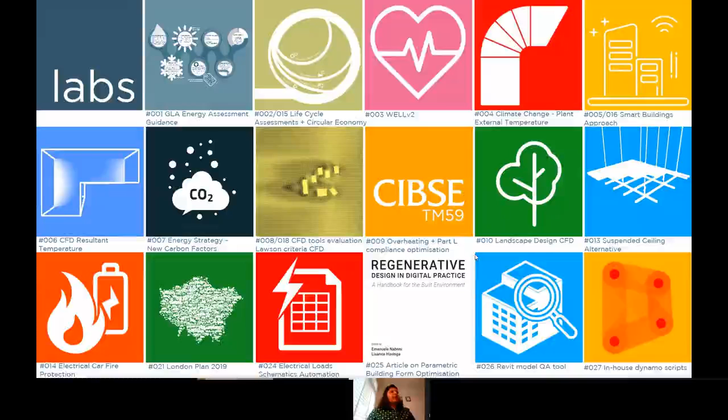That's a great initiative by Chapman's for keeping some resources and time aside for these things. The ethos of all our projects is this relationship that we call a planet to person to planet relationship. So starting from looking at the site climate, then master planning stage, looking at how the buildings should be designed in a particular microclimate or climate, then looking at buildings design, occupant behavior and how they perceive the building, and then giving back to the planet in terms of reducing embodied carbon and going for the certification scheme. So it's a relationship that we follow in all our projects.

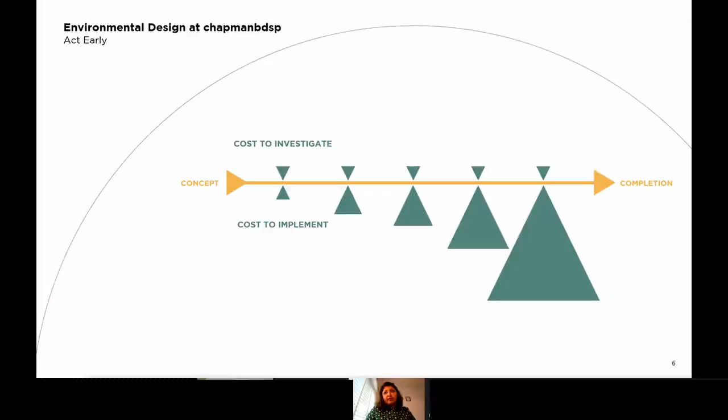We always suggest our clients to act early in the project because these passive design measures are easier to investigate and implement at early stages of the project rather than leaving it till later. Also, we all know we are in this climate emergency, so it's really important to act early in the project.

Like our peers, we have signed the construction declaration. That doesn't mean our job is done. We are striving to reduce carbon in all our projects, and also in how we operate our business. Obviously, we have this big target of having all new buildings zero carbon by 2030, and all the existing and new buildings zero carbon by 2050.

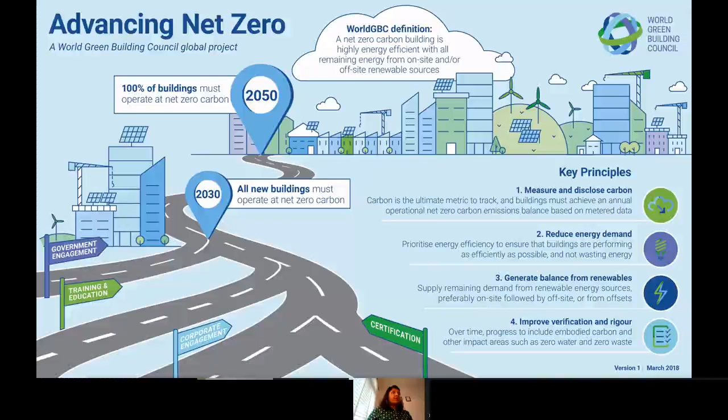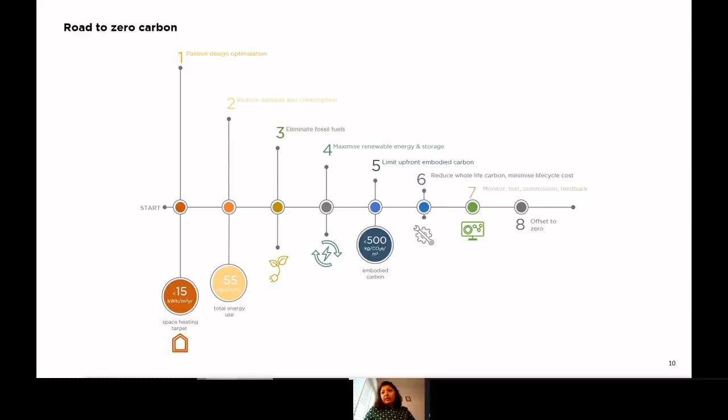So that's a massive challenge ahead of us. In terms of talking about the road to zero carbon, I would like to say it's an 8-step approach. The first two things that we are going to talk about: the first one is obviously passive design optimization, and the second is reducing demand and consumption of the buildings. These are the two topics that we'll be covering today. All of them are so involved that there could be a CPD on each of those steps, but the first two steps are the ones we are going to cover today. So now I'm going to hand over to Herman, who's going to talk about this project in Nairobi.

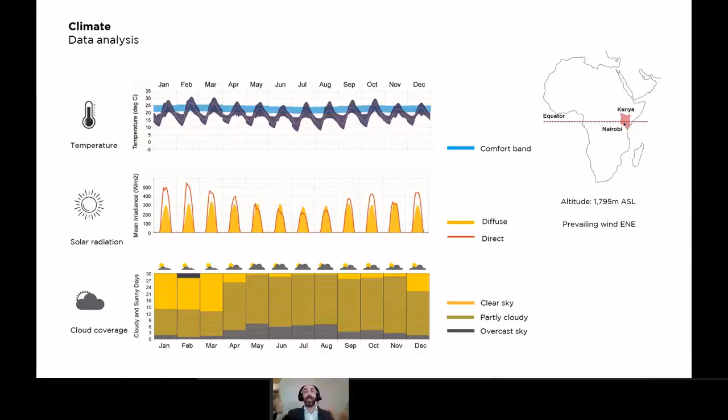That was a very good insight that we got, shown in the second graph, which is also related to the third graph showing cloud coverage. Typically, when you have a large amount of cloud coverage, you have a higher amount of diffuse solar radiation. So that was a very good initial insight on the site, on the location.

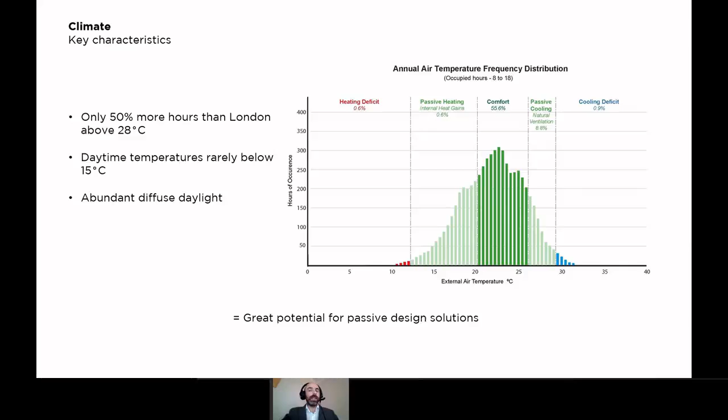Then looking further into how we can achieve comfort for this office, we looked at the period which falls within the comfort band, and the amount of time below the comfort band which we can still retain in comfort using the internal heat gains produced in the space through occupants, equipment, lighting, and most significantly, solar radiation. On the other side of the comfort band, we have the percentage of time for which we can still retain the space within comfort through natural ventilation as a passive cooling solution. That showed us that using passive design, we can pretty much have the building operating within comfort purely by using internal heat gains during winter and ventilating further during the summer period.

When we looked at other case studies or examples of what's happening around the site, most of the other towers were in a way climate rejecting - they try to produce a building envelope which segregates the outdoors from the indoors, with the indoors conditioned through air conditioning. We didn't want to go with that option; we saw strong potential for a passive design solution. We saw they had very few openable windows, cores sometimes located on the facades irrespective of what's happening to the daylighting, etc. Most of these spaces were rather gloomy, both because they were using tinted glass and because of the location of the cores. So we learned from these examples what we should avoid.

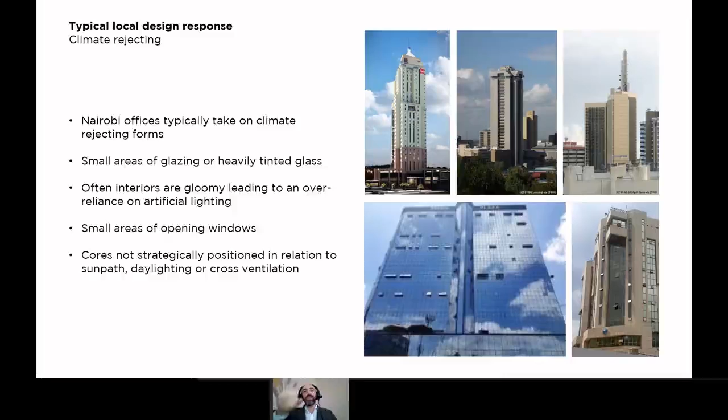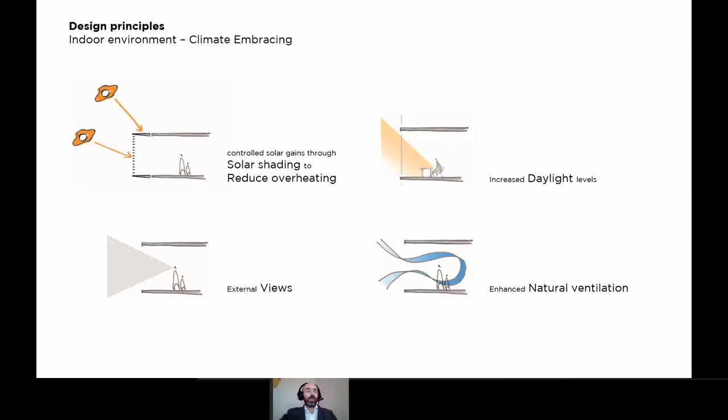Summarizing the lessons learned, we wanted to use solar shading to reduce internal heat gains during the summer period. We wanted good daylighting rather than relying on artificial lighting, and we still wanted to retain good external views for the place to be pleasant. We wanted to use natural ventilation as a means to retain the space within comfort during the summer period, or the warmer period.

So when we're looking at the different orientations, we saw that east and west were the orientations which received the highest amount of solar radiation, mainly because of the altitude of the sun when it passes across the east and west facades.

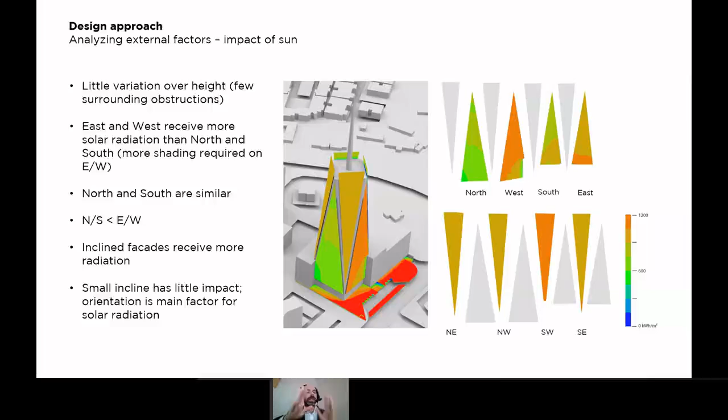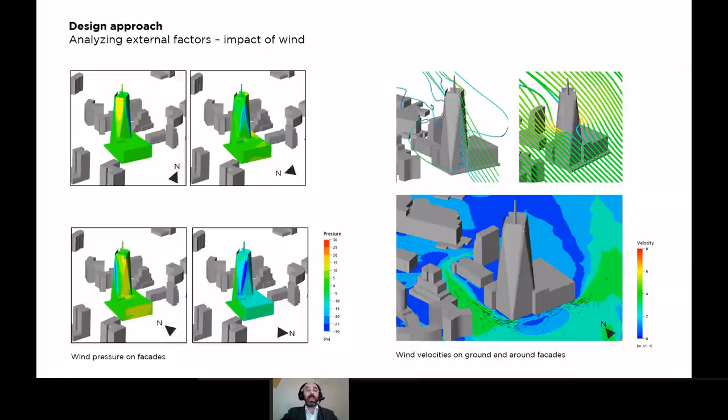So it gave us some initial indications, and then the inclination of the tower made a small difference, but not as significant as the orientation. We also did CFD to show what the wind pressure is, which can give us an indication of what wind speed we're getting for our natural ventilation.

And then we were setting thresholds or design targets with regards to daylighting. We were targeting a 2% daylight factor, which would translate in this climate to 200 lux on an overcast sky condition - that is when it's so cloudy you cannot spot where the sun is, which is not as common in this location. So we know this is a worst case scenario, while typically one would easily be over 250 lux, over 200 lux.

And we also had a similar threshold for the number of hours we would allow exceedance beyond the comfort band. Rather than having a fixed comfort band, we were using the EN 15251 comfort band, which takes into account that people's expectation of indoor temperatures relates to their previous experience over the previous 7 days.

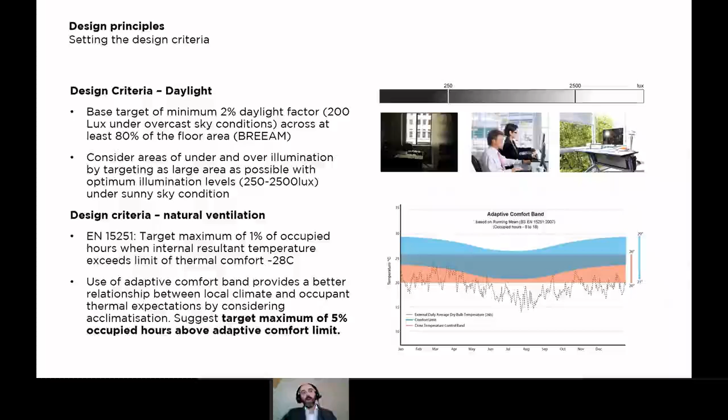And so then we're looking at, let's say, different palettes or different tools to try to get this cohesive passive design strategy. One aspect we definitely look at is the glazing ratio, then what percentage of the window will be openable or not, and then the type of shading and type of glass that we would use.

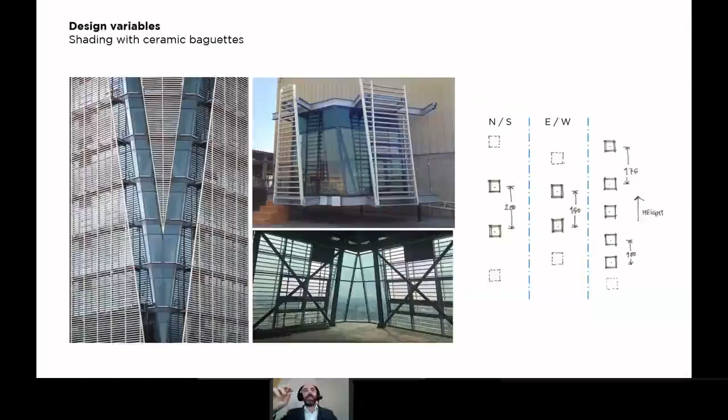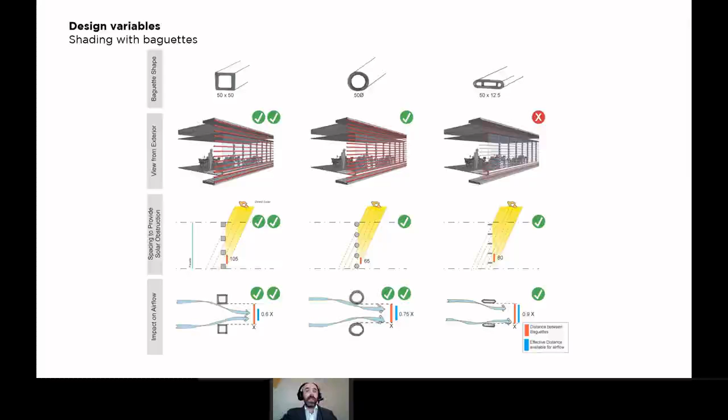Starting initially with the shading devices, we're testing different ceramic baguettes of different spacing and forms, trying to identify the benefits of each. One was definitely the view, especially looking downwards towards street level, and then we looked at how effective the ceramic baguette is at generating shading, and also its impact in terms of obstruction to the airflow.

While in a latitude like London, the third baguette might work rather well, especially for a south facade, in this location, due to the large amount of diffuse solar radiation, the first two baguettes were performing better because they were helping to protect a larger part of the sky dome.

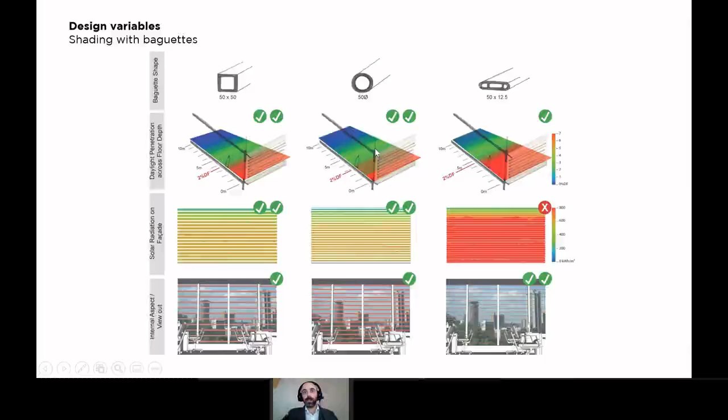Then we looked also at daylighting. Nowadays we look more to what we call climate-based daylight simulation rather than daylight factor. The daylight factor will show a performance irrespective of orientation, while when you look at the actual amount of lux falling on the grid, we can see the impact between what happens at 9 o'clock, at noon, and in the afternoon. So we looked also at that.

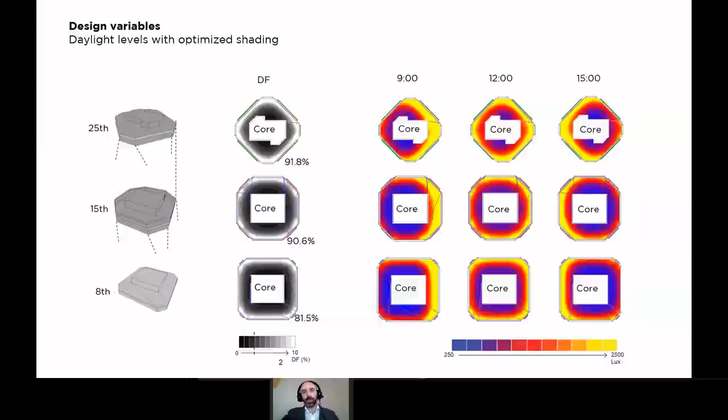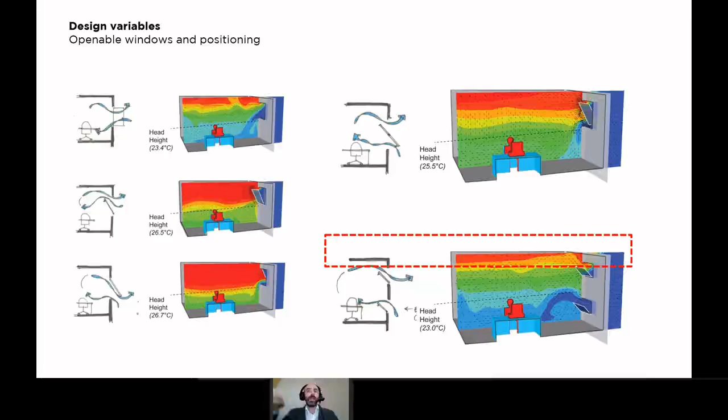And then trying to decide on the openable percentage of the windows, but not purely on opening the window, but also the location of the openable window. The most effective solution was to have two openings - one would have a less turbulent flow through the space, because generally the lower opening would bring in cooler air from outdoors, and then warmer air would seep out through buoyancy to the high level window.

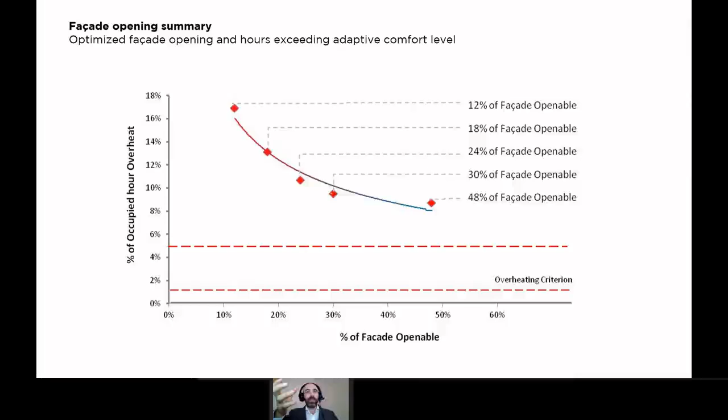Then once again, we're looking at the impact of changing the percentage of facade openable area with regards to the overheating criteria, and then adding the different passive design strategies. So first we started with rules of thumb for the percentage of openable area for the window, then we enhanced the selected glass.

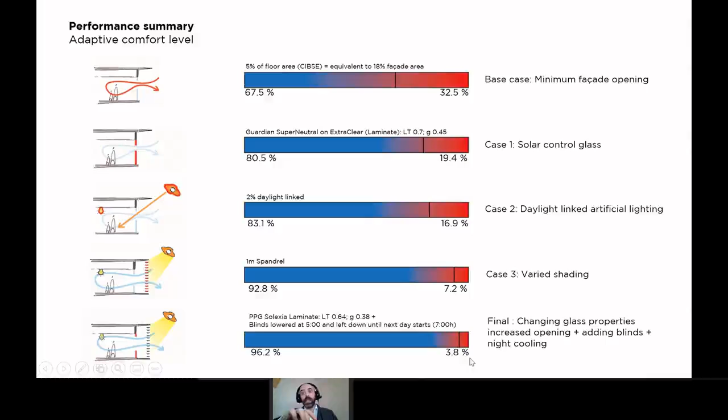Then we're doing daylight linking, that is, the artificial lighting would switch off when there's enough daylighting in the perimeter zone. Then we used the ceramic baguettes and saw the impacts of those, and finally we did some combined optimization, fine tuning the selection of glazing, baguettes, and openable area. It got us to a point where we'd be beyond the comfort band only 3.8% of the time, a very successful percentage considering the location.

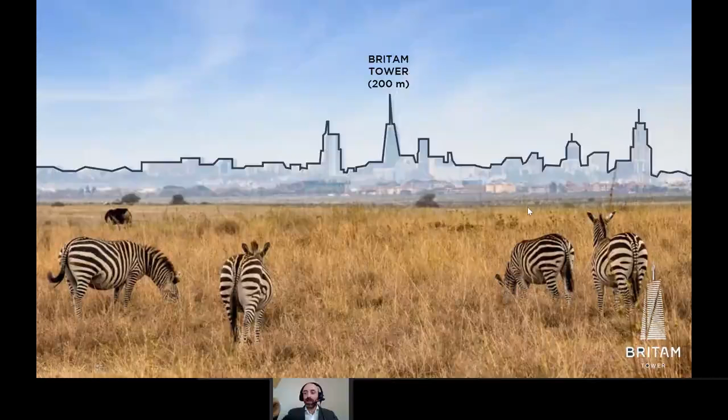This is the project, and yeah, we actually won an award very recently for the MEP of the tower.

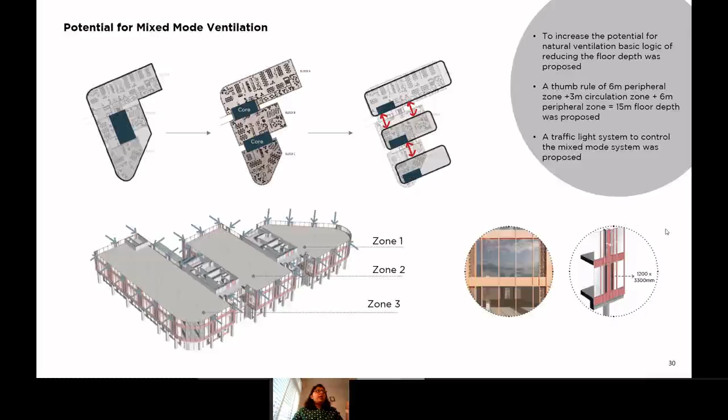Looking at different scenarios—one with only natural ventilation, a combination of natural and mechanical ventilation, and only cooling—we tested the cooling demand and what impact this would have.

To explain the graphs on the right-hand side: yellow is the case with cooling only, so that's our base case. Green is the case with mixed mode ventilation, assuming windows will open at 21 degrees and close at 23 degrees, as the cooling thermostat is set to 24 degrees, and then there's an intermediate case.

The reason for testing the intermediate case is because we are relying on occupants to open those windows. Some might decide to ignore the traffic light, or they might be busy. You might have 50% occupancy in the offices, so there could be different scenarios. So we decided to test an intermediate case where only 50% of the windows will be opened.

Looking at the results, just with mixed mode ventilation, we found that during the peak summer months—between May and September—the cooling operating hours can be reduced by 72%. That's a significant number. Even if only 50% of the windows are open, that could still reduce it by 48% of the time—again, a significant number.

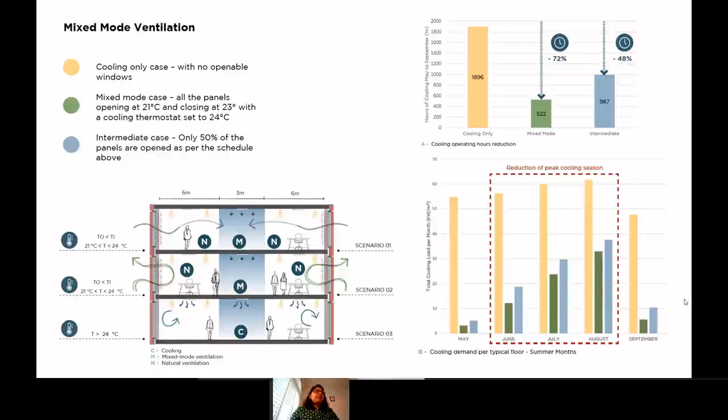Also, if we look at the monthly cooling demand during the peak hours within this red dotted line, you'll see the cooling demand is reduced significantly, and anything outside those peak months would depend mostly on natural ventilation, as the cooling demand wouldn't be as high. So that's a big green flag for incorporating mixed mode—obviously challenging, but still really useful.

Now I'm going to show a project example where all these principles were applied—that's the LSE CBR building. The environmental concepts applied to this project included outdoor comfort, flexibility and adaptability, natural ventilation, daylight, solar control, and all the rest.

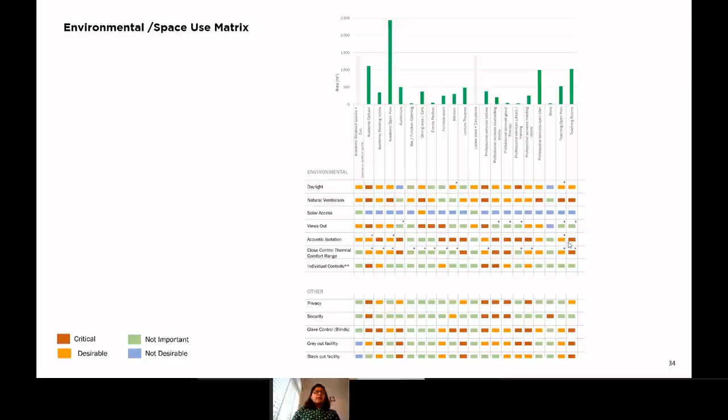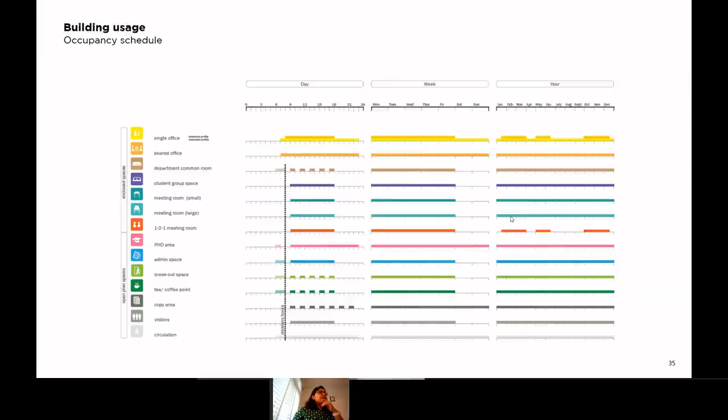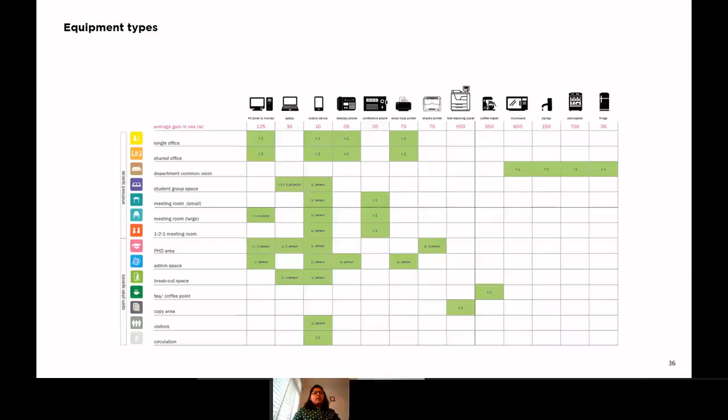Because the idea was to do a detailed energy analysis, we looked at what small equipment these spaces will have and how many of those equipments these spaces will have. All this helped into a zoning strategy.

Looking at the public and private zoning, we decided with the architects that the ground and basement floors will be more for public areas. The floors above, say first and second, would be more semi-public, so collaborative spaces, and the floors above that would be semi-private or private, with cellular offices, for example.

Going by the same logic, the lower floors in terms of occupancy will be high occupancy, so the auditoriums and big lecture theaters will be in the basement and ground floor. Then the medium to high occupancy spaces on the floors above, so that's your collaborative spaces again, and then the floors above that would be low and medium occupancy.

What this finally led to was a mechanical strategy where the lower floors with high occupancy and public areas were decided to have active cooling, so these are spaces like auditoriums and lecture halls. The spaces above would have mixed mode because these are bigger, more collaborative spaces, and the upper floors, which are smaller cellular offices, would be all naturally ventilated.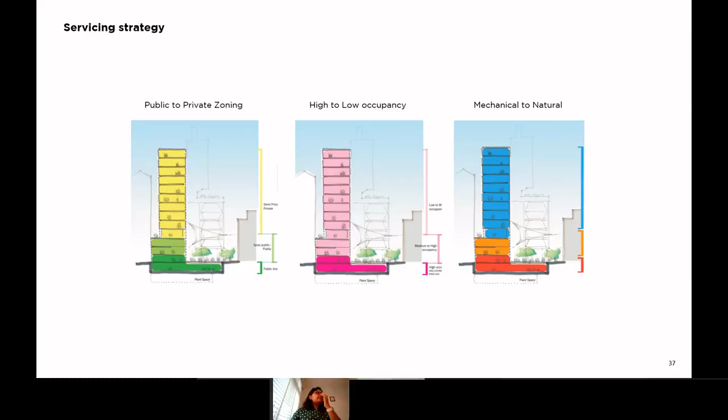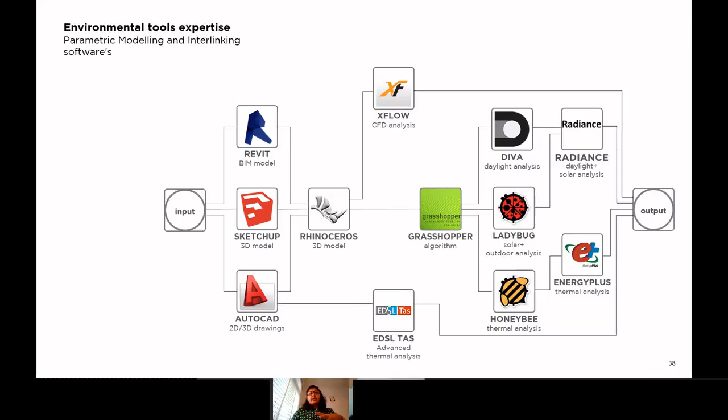The project was quite challenging, and trying to balance all those factors meant output from one software would be input into another to finally get to a result. It obviously involves some really clever algorithms and complex modeling.

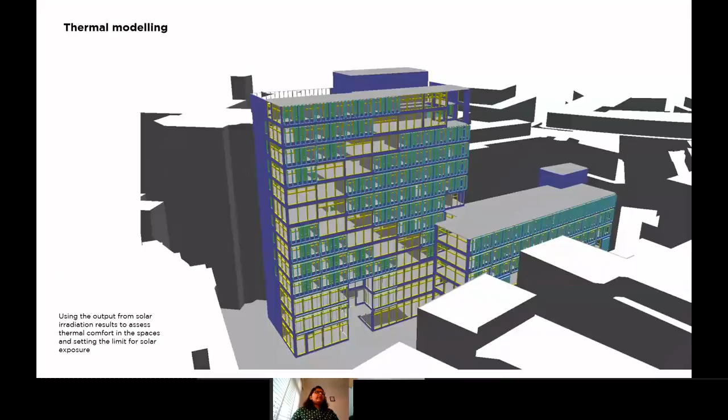I started looking at the irradiation mapping and what the solar exposure would be on the facade, then undertook a thermal modeling to see what the maximum fin depth should be to avoid excessive solar gains on the floors and avoid overheating. Applying that logic, we came up with a facade optimized design.

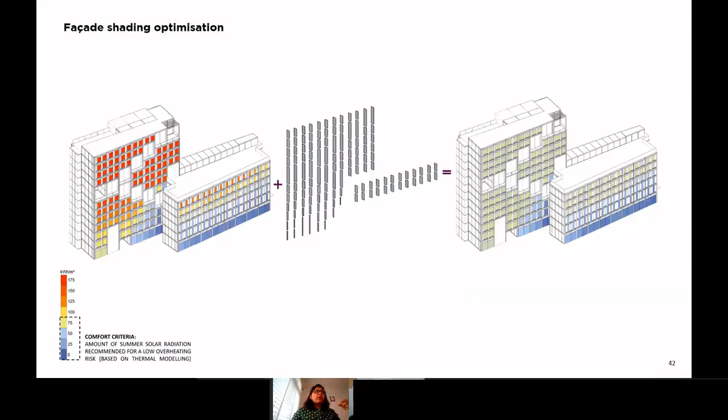I'll show you something after this slide, but this facade optimization made sure that the floors do not get excessive solar gains and they stay within the comfort range required to avoid overheating.

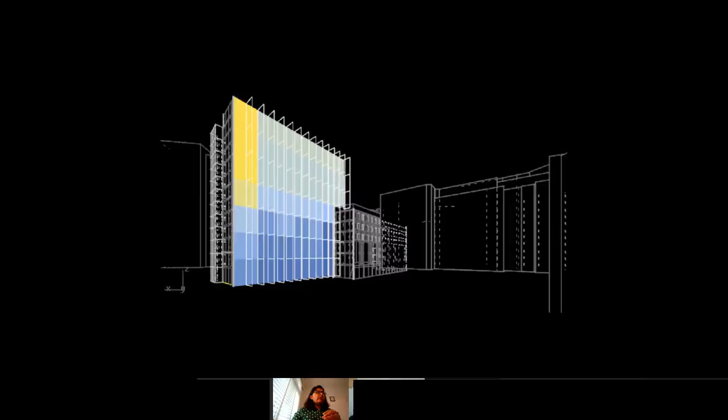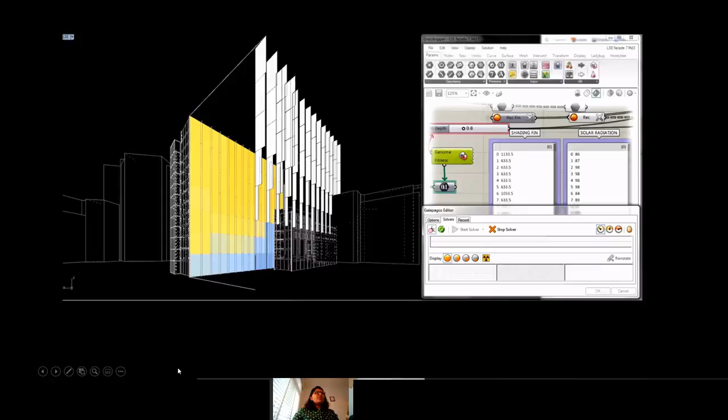Hopefully this video will work. It is a bit slow, I'm not sure if you guys can see it, but basically it tests the fin depth at each bay to figure out the optimized depth required to get the solar access levels desirable to avoid overheating. The video is really slow. Let's try if this works. Not really. Harman, can you see it working? Okay, no, this is not great, it's just extremely slow.

Okay, this is working now. So it's showing all the parametric modeling and how those two factors, solar access and overheating, were controlled through this design of solar fins.

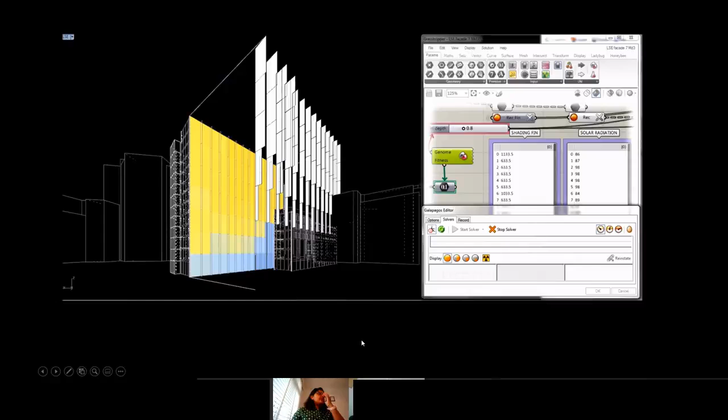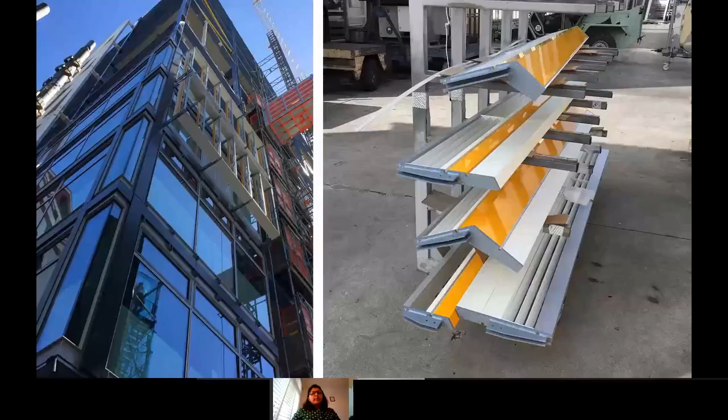To decide the spacing between those fins, a daylight study was done to balance daylight factors achieved on the floor plate against the overheating ratio. This is the final sketch of what the facade looked like, and a mock-up. The building is now complete and open for visitors to go and have a look around.

Also something about flexibility, which was really interesting because there are so many different types of spaces in this building. We looked at different flexibility and different modules, and what fenestrations we have for facilitating natural ventilation, for example a combination of high-level automated windows, manual windows, fixed windows, internal doors, glazed partitions, and others.

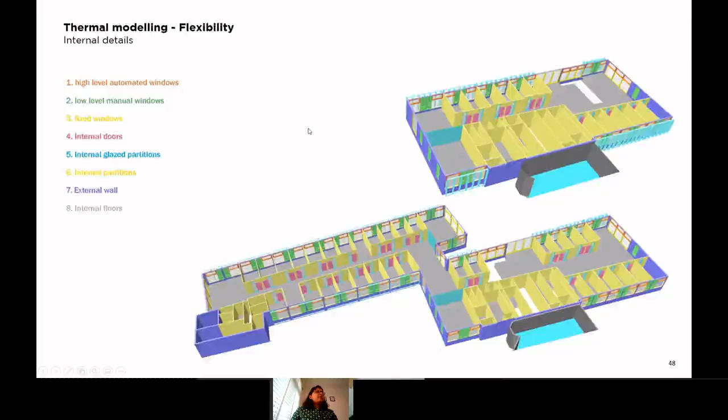We looked at what typologies we can have on each floor. So there are some floors with cellular offices on each side and circulation space in between. Some floors have cellular offices on one side and open plan collaborative spaces on the other side. Some will have cellular offices and double height spaces on the other side.

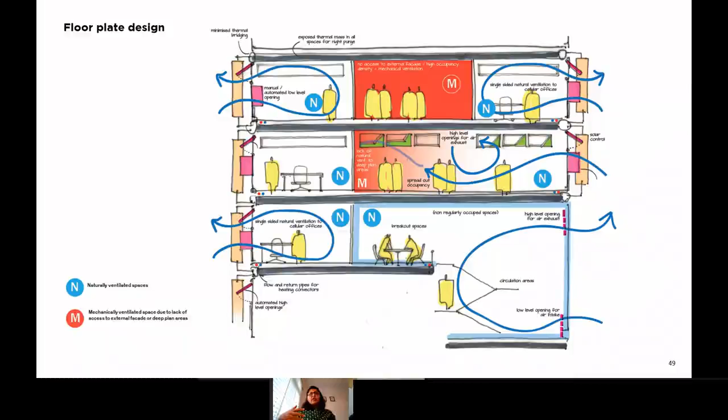It was a combination of natural and mechanical ventilation, especially on lower floors where we were going with a mixed mode ventilation option. On the floors above, where we have completely naturally ventilated floors, we did a detailed overheating study to look at if we meet the TM52 criteria.

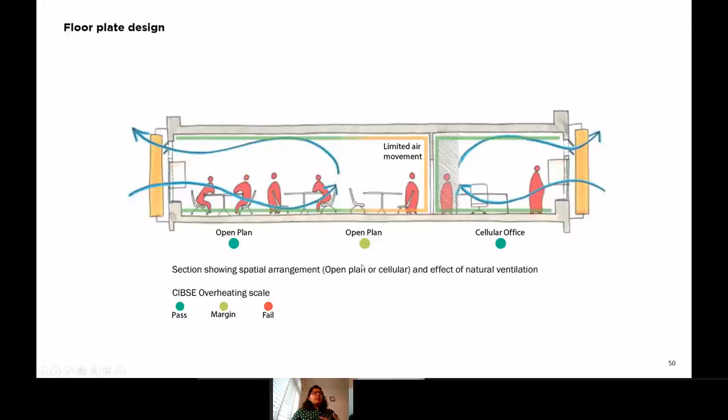The greens, as expected, show the spaces next to the windows, the peripheral spaces, met the overheating criteria. The spaces which were more internal marginally met the requirements, but none of them actually failed. So that was a big positive.

Applying all these different factors of solar access, open spaces, and cellular offices, we provided architects almost a palette to decide where the spaces go on which orientation. For example, if you look at this diagram with different zoning, zone 2 is probably the easiest one, where you don't get as much solar exposure. There's no potential for natural ventilation because it's an internal space, so it's good for circulation.

But if we pick zone 5, it gets decent solar access because it's close to the windows. It has good potential for natural ventilation, so it could be used for big open areas for students or admin staff or breakout space. It could be used for circulation as well, but that would be a waste of space. Basically, we started giving these zoning diagrams to the architects to decide their floor space or floor layout.

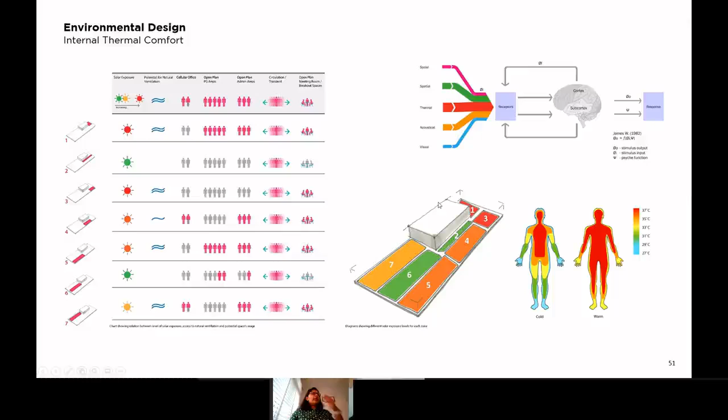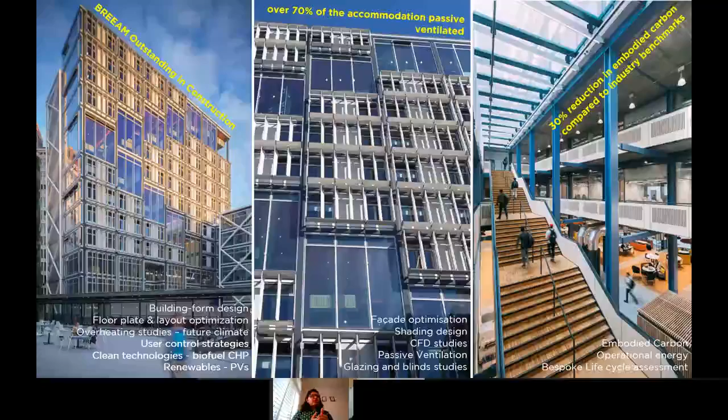So in summary, the building achieved outstanding in construction. It has all these strategies I've already talked about, but in terms of clean technology, it has biofuel CHP. For those who don't know much about biofuel CHP, it's a combined heat and power plant which runs on waste from the pharma industry, and there's one provider for this waste fuel who basically takes a boat around, collects all the waste from the pharma industries, and delivers it to the site. So the only carbon footprint is actually in transportation.

It also has PVs to offset the demand. Over 70% of the accommodation is naturally ventilated. And we're not doing a CPD on embodied carbon, but I thought it would be good to touch on that - with measures like recycled aluminium and other measures, we could reduce embodied carbon by 30% compared to industry benchmarks.

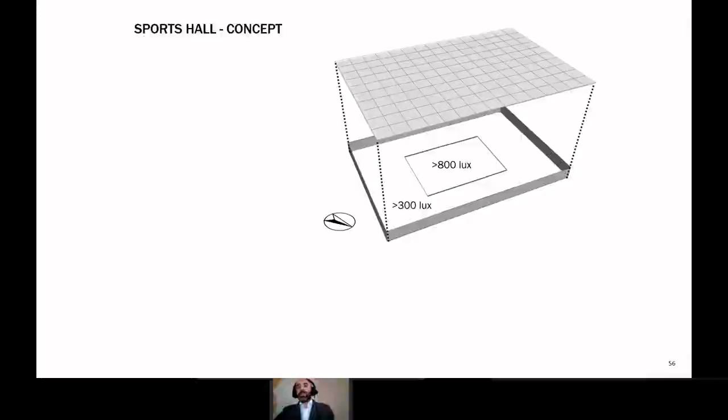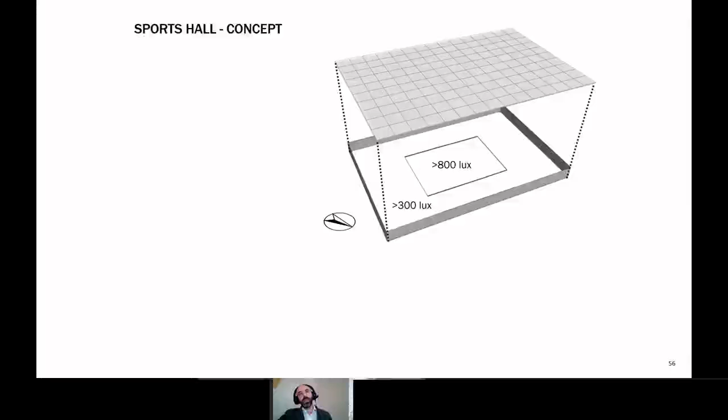Thank you, Deepika. So trying to explain a bit the process that we take in terms of trying to optimize the design - this is a sports hall. We have a target of 800 lux or above for the court and 300 lux or above for the audience area. So we start first with the thresholds or design targets, and then we put in the design variables - that's what we put into our scripts. For example, in this case, of course it depends on the design solution.

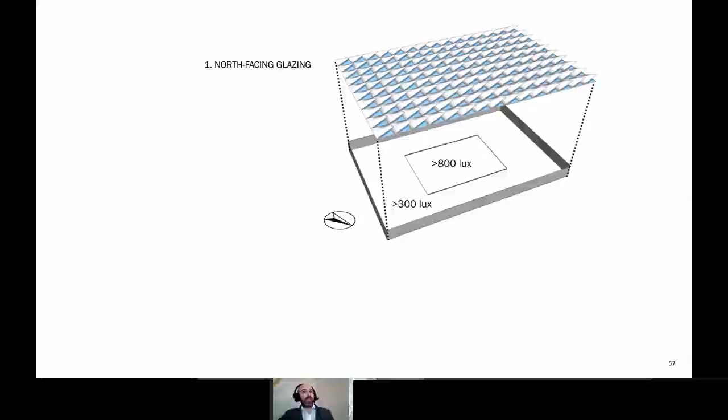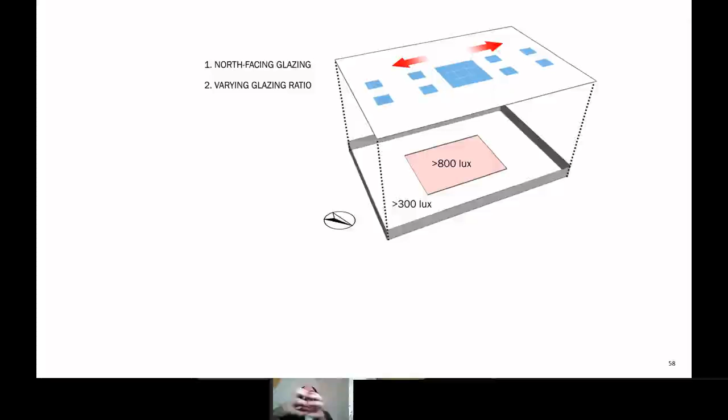Then we have the actual analysis - in this case, we'd be simulating how much light is falling in the space. Once we get results for both the audience area and the court area, we compare: are we meeting the threshold, yes or no? If we meet it in both of them, then the design is a good solution. And we would run for a range of values, and we would get different results.

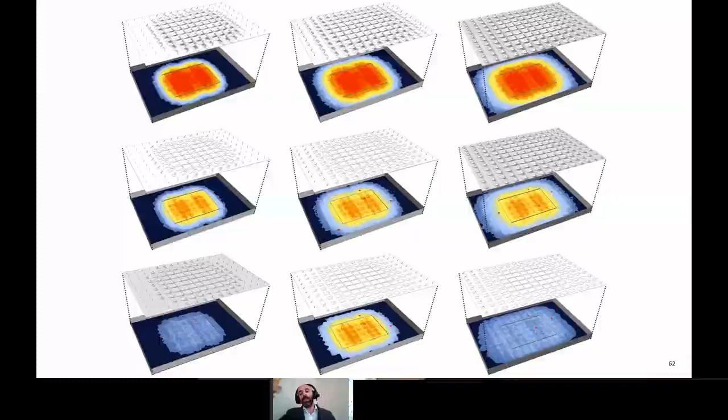Once we've run a number of them, we can identify which solution - often you have more than one solution - would have met the criteria. In this case, this solution would be an adequate one, for example. So this is, in a way, the approach that we take.

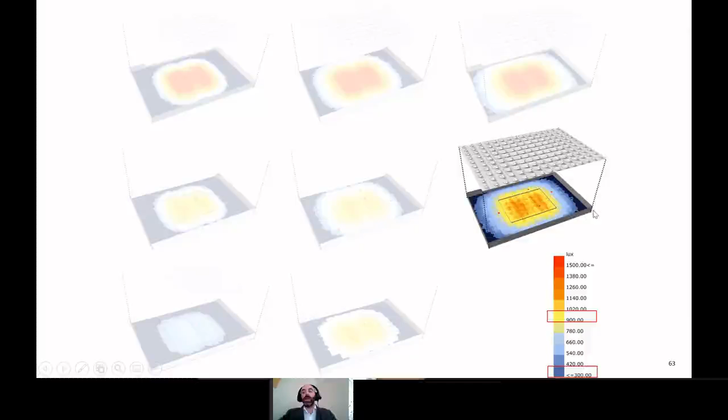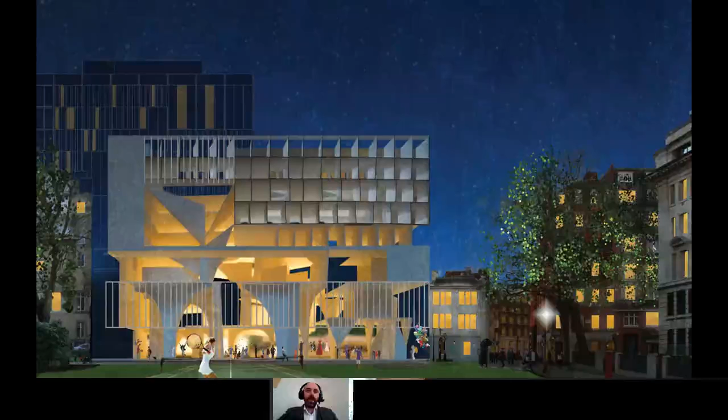Going to an actual application of this on a project, once again for the London School of Economics, but this time with Grafton Architects. This one is still in construction. Just some images from competition stage when we won during the competition - it should be a very beautiful sculptural building.

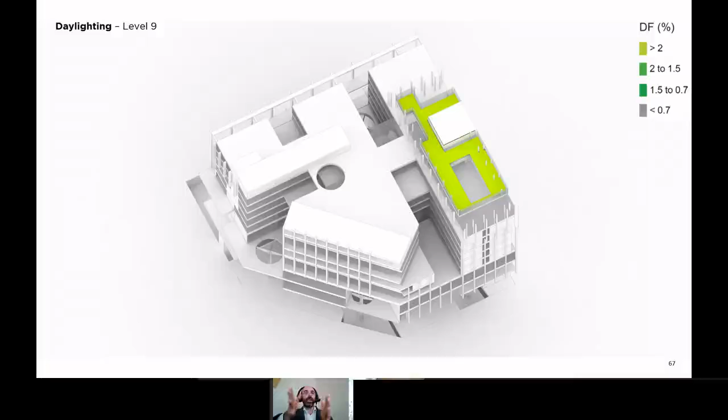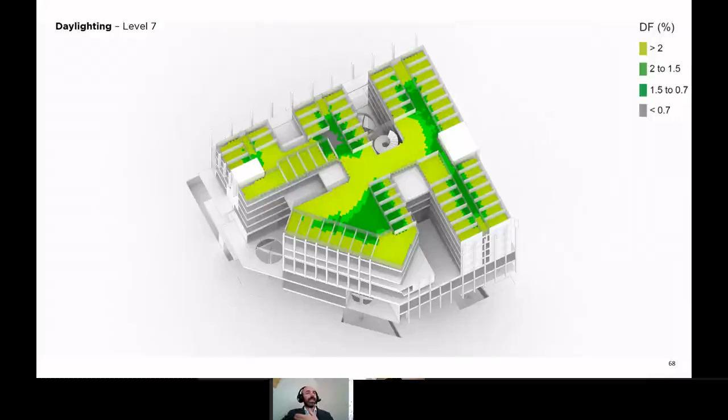As Deepika mentioned earlier when showing the plans and how they were cut to allow for ventilation, in a similar approach here, we introduced these different cuts within the volume, both to allow a good amount of daylighting and also to allow a narrower floor plate so we can have cross ventilation. You can see a very good performance with regards to daylighting, while if you look at the actual site footprint, one could have easily ended up with a very deep plan design. We have a good amount of daylight even at the ground floor level.

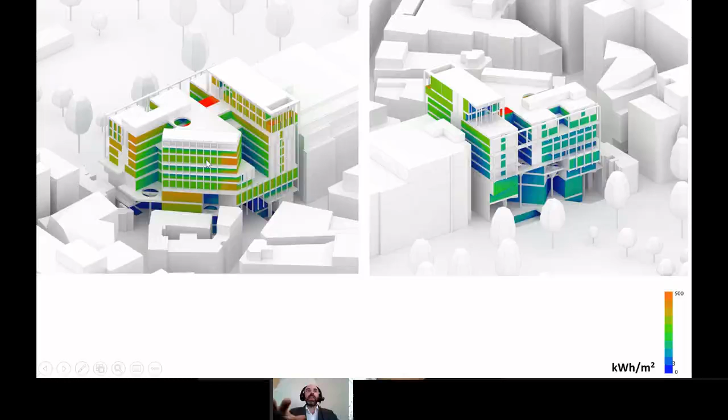So we're looking both at daylighting and at the same time at thermal comfort. We would typically do solar radiation mapping studies on the facade, and using this information we were able to simulate and come back with different recommended glazing ratios for the different orientations. So while this was the solar radiation mapping, what we're showing in this image here is - the coloring is a legend.

So what you see on the facade is the recommended amount of glazing ratio for that particular area. In addition, while we have a higher amount of glazing area in sheltered, protected areas on the lower floors, the higher amount of opaque element on the higher floors also helps reflect light back down to the floors below.

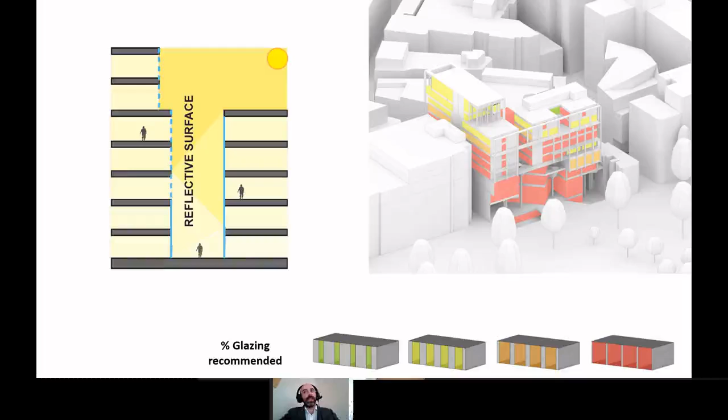And in addition to that, because normally we wouldn't want to tell the architect, 'this is the solution,' we would like to support the architect by giving them a selection of solutions.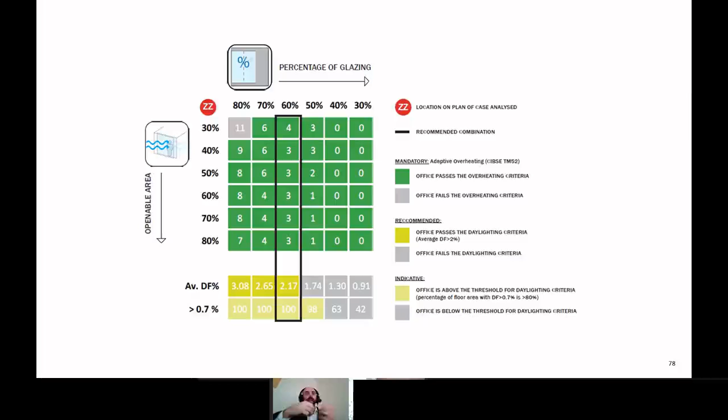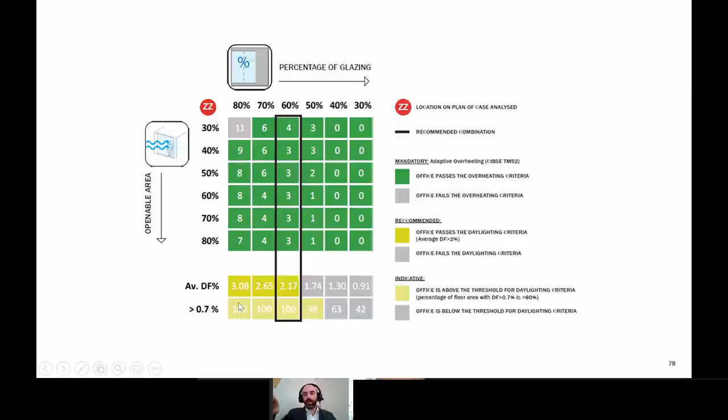So what we did here, we have different glazing ratios shown horizontally and vertically. The rows show the different percentages of openable area of the facade. Using that information, whenever it becomes green, we're telling the architect, go ahead, it's a good design. We're doing something similar with the daylighting shown in lighter green below. And we would do that for all the different parts of the building, giving different recommendations of glazing ratios and openable areas.

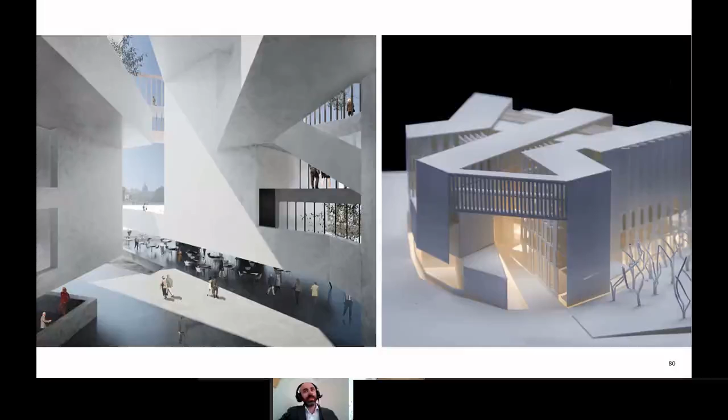That was similar work with Grafton Architects, using similar principles. This is the Toulouse School of Economics, which was also recently finished. And this is a much earlier design, also in collaboration with Grafton Architects, the Bocconi University in Milan, where there was also a similar design using light shafts that are actually sculpting and forming the design.

So in a way, many times there's this concept that sustainable design or environmental design can become boring, just a PV at the top. While in reality, once we have a truly climate-responsive solution, it can be quite an exciting outcome.

This is a master plan we're working on in a location in the Mediterranean, to show the approach at a macro scale. Typically the interventions carried out at an earlier stage, in the design of the master plan, can have quite an impact on what potential passive design strategies we can apply. For example, if we have a space surrounded by tall buildings with no proper access for natural ventilation, then we cannot really apply natural ventilation so easily anymore.

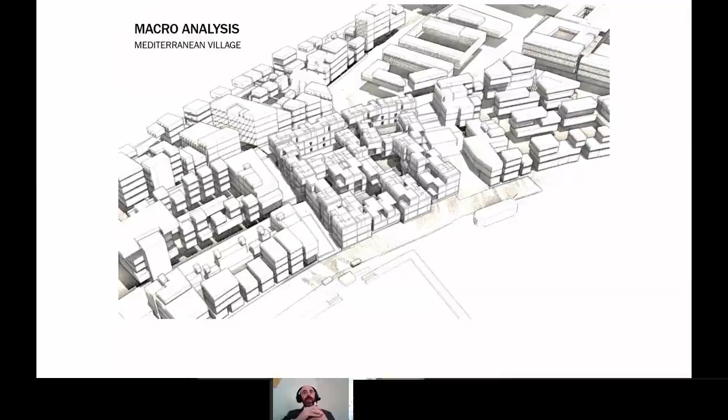So it's important to have this approach that Deepika mentioned earlier, this people, planet kind of approach, where we look at the macro scale and then back to the building scale and so on. What we try to do here is have a tool to help us provide the massing.

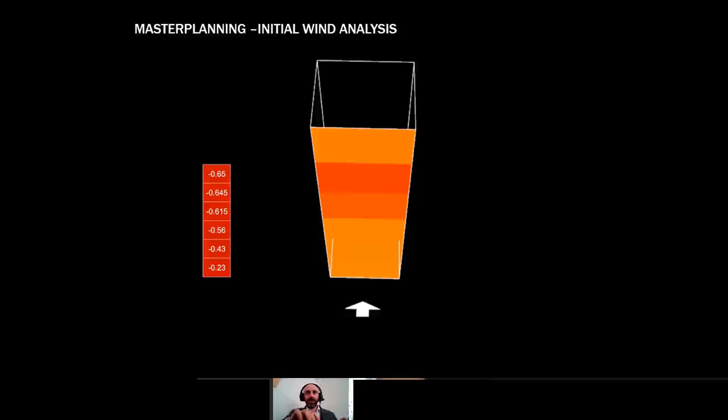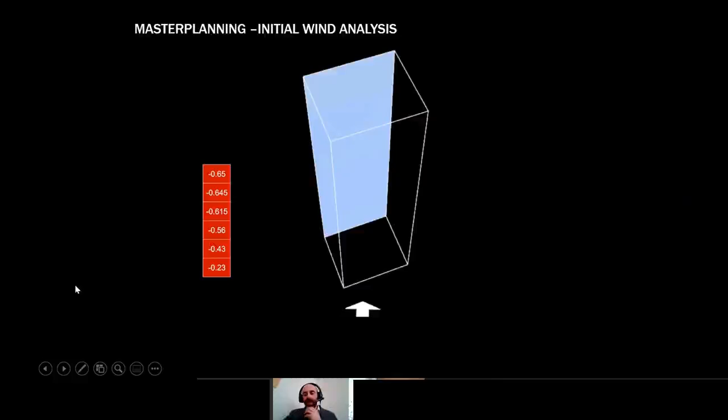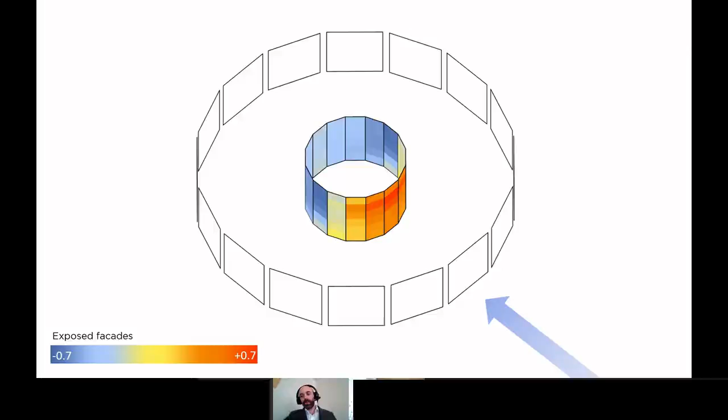So what we did is a CFD study for 16 different orientations, to see what would be the wind pressure on each of these orientations. We did this for three types of proximity with neighbors: one scenario where the distance between the adjacent building and our building is quite far, and a medium scenario where the neighboring building would be close to us. We ended up with these different figures for the different orientations.

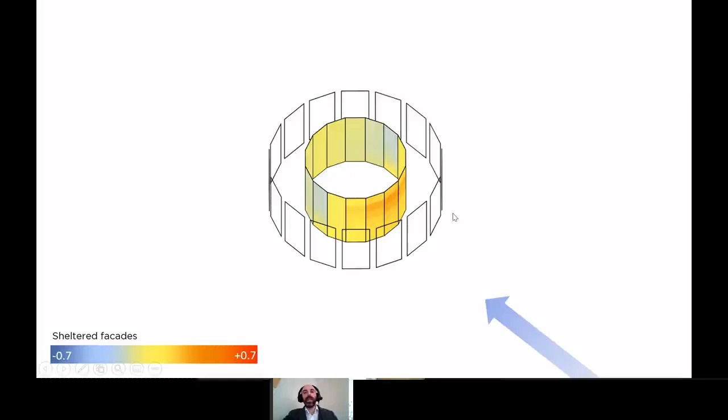Then for every hour of the year in the climate and weather file, we would look at where the wind is coming from at this hour. It's coming from this side, so the angle of attack is this one. We would choose that particular phase of the simulations, then see at which floor we're studying at the moment.

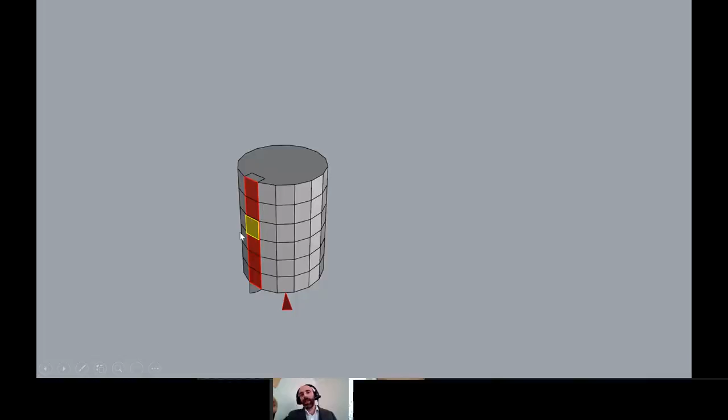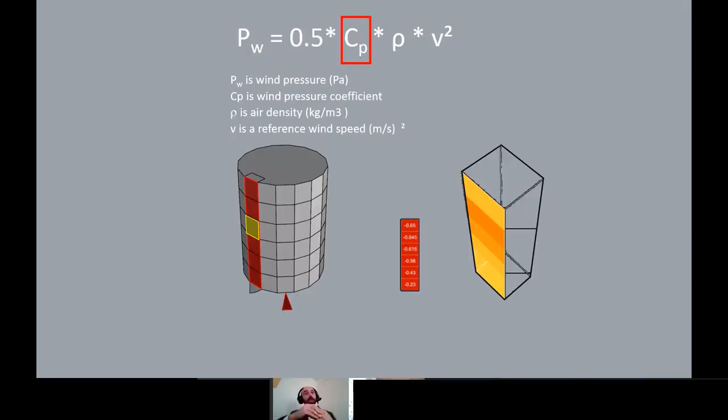So we look at that particular window, then pick up the pressure coefficient from those CFD figures we had before. Using that, we can get back the actual wind speed that would be passing through a given window on that facade. We did this automatically for all the hours of the year for any given geometry that we put in.

This allowed us to have a combination of simulations. We're looking at solar radiation, in this case wanting to reduce solar radiation in the summer period. We had the percentage of sea view, which was quite important for a site by the sea, the amount of vertical sky component, which is an easy way to understand daylighting availability, and the average wind speed, which was being measured through this computation.

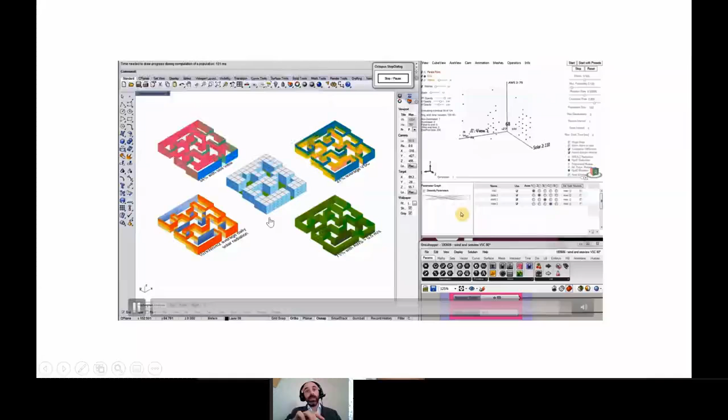And we were plotting all these different solutions. So we have 3 axes: the average wind speed, view and daylighting on this axis, and solar radiation here. So in this case, we would want a solution which has low amount of solar radiation, high amount of wind speed, and good view and good daylighting. So this would be, let's say, an ideal design solution would be one of these ones.

And this, in a way, was how we helped to recommend some massing solutions. Once again, there isn't one good solution. So all of these, 1, 2, 3, they would all be good solutions or better, which is performing here, for example.

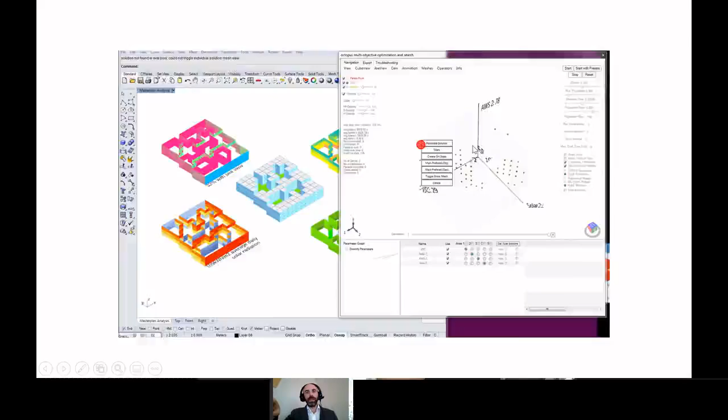That's it, so it was basically summarizing. We look first at the climate whenever we get to a project, and then we look at the surroundings. How is the surrounding also generating these different microclimates for our design? Then we look at building scale, and then how that building is affecting the occupants, and finally how the building is affecting back both the environment and the neighborhood.

We still have a couple of minutes before the... okay, go ahead. No, go ahead. Because I was about to say we still have a couple of minutes before the end of the presentation, and feel free to drop any question you wanted in the chat section. Have you finished, Herman? Yeah, we're done. Congrats, you are just in time.

So we still have like 15 minutes to answer any questions. We have one from Jessica Cassian: Great presentation, Dee and Herman. I would like to ask, since there's a lot of data available on occupancy comfort for non-domestic, what lessons learned could be applied to domestic projects to improve indoor thermal comfort?

Yeah, that's an interesting one. Herman, do you want to go first? So for domestic or non-domestic? Domestic, the question is for domestic, how it could be applied to domestic. Yes, so in a similar way, the measures or the methodology that we used in the simulation shown would be relying on EN 15251 comfort band, which is basically using the CIBSE TM52 methodology. It is very similar to the methodology applied for domestic uses, which was published more recently, TM59. It basically takes one of the criterions of TM52.